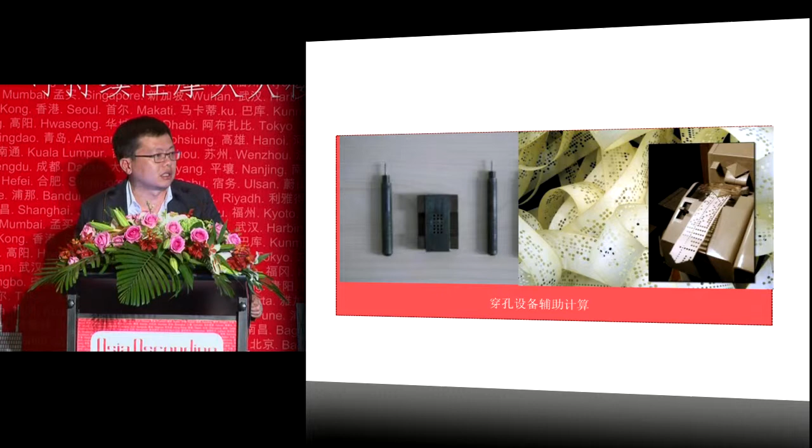And I think IT development has always accompanied our development in these several decades. You see, at the beginning, we just used the auxiliary calculation technology. In the 1980s, we used this kind of calculation method. But this is just a very small scale technology.

But in the 1990s, we had computer-aided design, or CAD. And today, we are still doing computer-aided drawing, but this kind of technology has already changed the design or engineering approaches to a great extent.

And then, according to my memory, around the year 2000, because more and more domestic big projects were being built based on cooperation, we absorbed a lot of advanced concepts, no matter whether in CAD or standards.

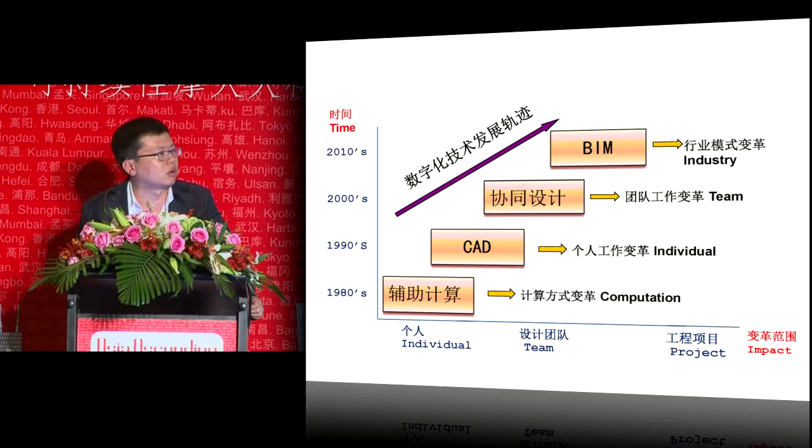And I remember East China Architectural Design and Research Institute at the beginning cooperated with OMA on CCTV. They were doing, for example, dissection of drawings and deepened analysis to control the quality of the drawings.

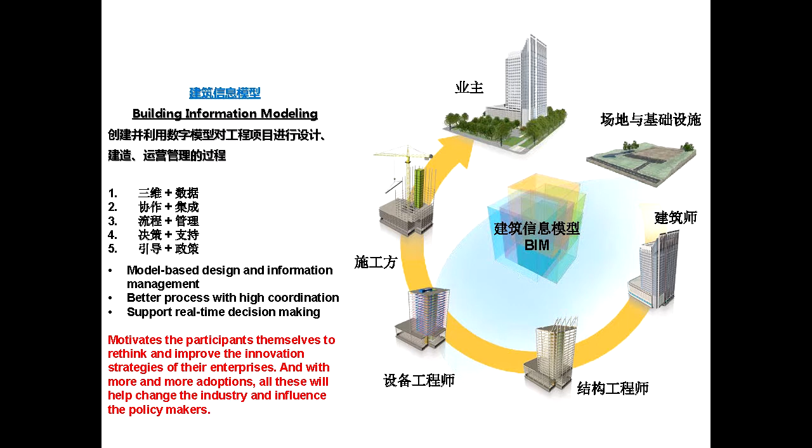And in the past 10 years, less than 10 years, BIM is gaining momentum. I think the appearance of BIM, or the appearance of the concept, for our industry, is actually a great driver for the industry approaches.

For the concept of BIM, I don't think I need to elaborate on it. Here I just listed our team's and our company's understanding of BIM. I think first, not only is it a three-dimensional thing, it is more based on data or information. And this is a great difference from past tools.

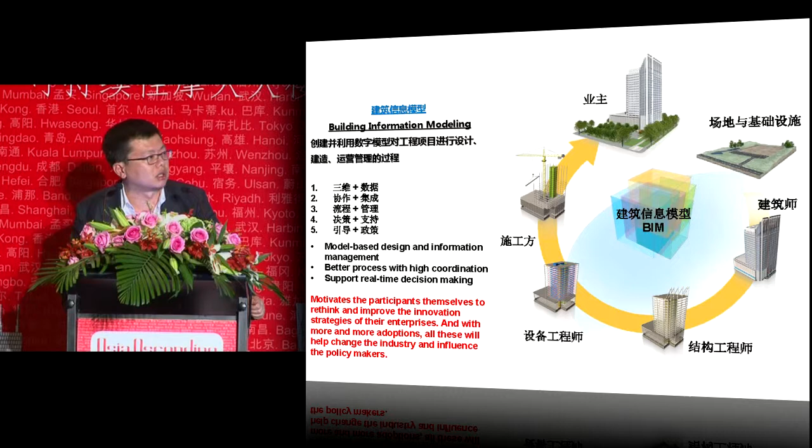Second, it emphasizes coordination and integration. That is, not only restricted in design, it can coordinate different parties involved in the project. Number three, I think the most important reflection of the change is in the process of the project. It can better promote the management of different parties of a project.

Number 4, in China, a lot of big, complex projects are pressed in time and they're also really complicated in structure. Owners have a great headache. They usually say that a lot of the time they are managing passively. With the progress of the project, their management becomes more and more passive.

But BIM can offer a lot of data. It can support our owners to have a better understanding of the project in real time, and can help the owners to conduct more active management instead of passive management.

Finally, I think the most important thing is that this kind of change is not only a change of the industry through this kind of model, it is leading different parties involved in the project to change their innovation strategy and technical development. So this is rather significant.

And during the process, with the increase of acceptance in the industry, I believe a lot of policy making and coordination from regulation can find a better or clearer direction.

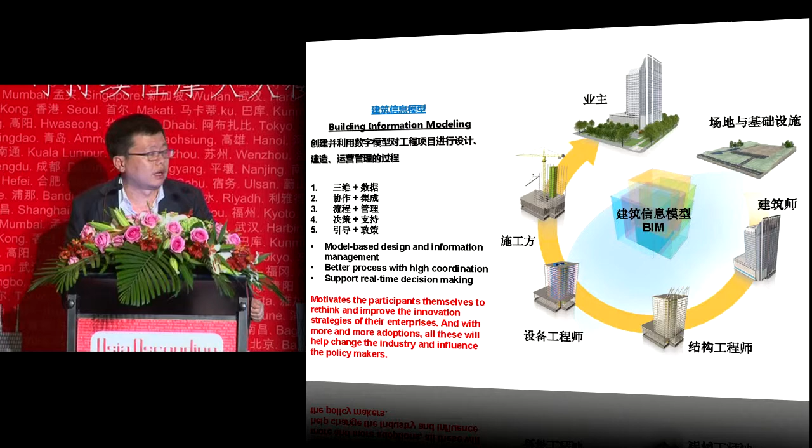Now, through one of our cases, I would like to share more with you on BIM. Because we are a big design institute, a big consultancy, quality is really important for us. Personally speaking, although design, construction, and management are all very important, I think with the aid of such a tool, if you can design really well, it can lay a good foundation for our project.

BIM can help us gain better design quality. We're always encountering a lot of problems. These are 3 of them. First, how to face the challenges from architectural shape. Now, more and more projects include nonlinear projects and complex shapes or forms; these are indeed the dreams of the designers.

Owners like these kinds of forms or shapes, but how can you ensure the good completion of such a project? How can you guarantee the implementation, instead of the final result after implementation being different from what was originally planned?

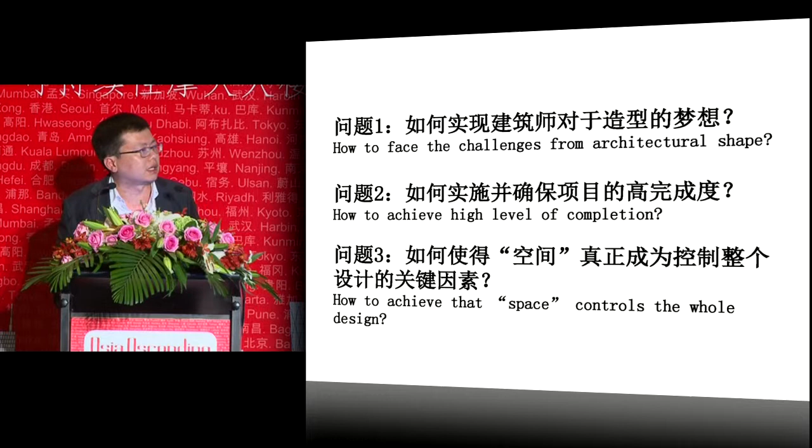The second is how to achieve a high level of completion. To be honest, currently we still have a lot of projects for which the completion is based on facade or horizontal design.

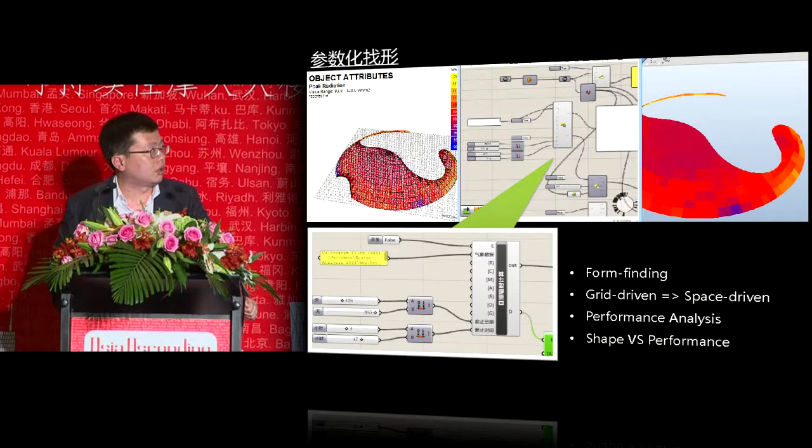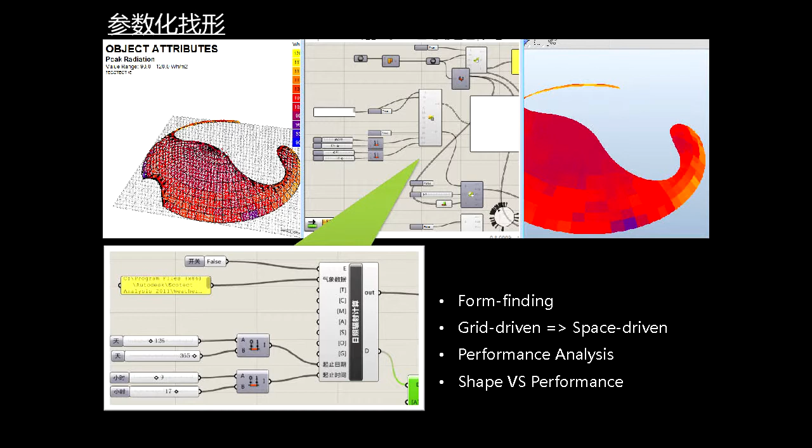Starting from the planning, not only we considered geometry, not only form finding, we also considered the local climate. And we looked at the meteorological data in that locality and looked at its influence on the solar radiation all year round in that place to try to balance the shape and the function for the building.

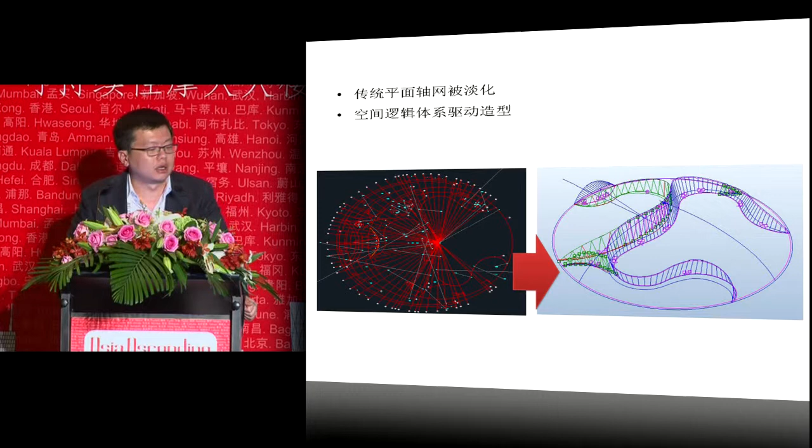And actually, the traditional axial network is faded, and we are looking at the overall spatial logic to look at the structure. A complicated structure is the steel structure. It includes over 2,000 steel rods. And the traditional method is just based on a very simple coordinate. But because the site is really special, and during the year the frozen period is really long, we hope that during the design phase we can cope with it better.

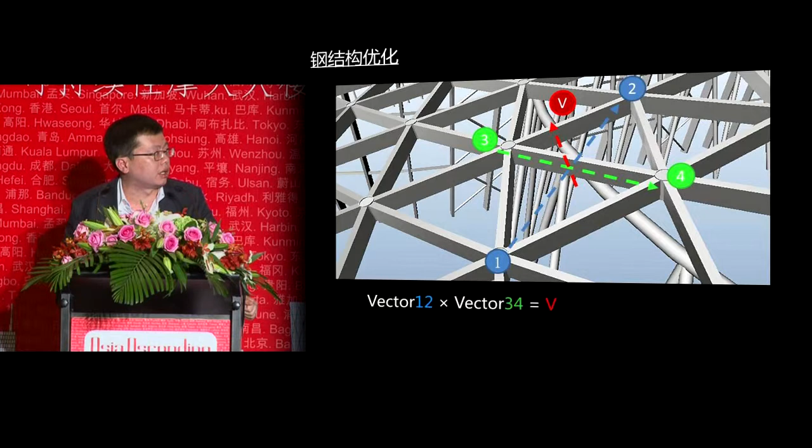And so we used a mathematical matrix method, that is to multiply the two vectors. But the whole project includes over 2,000 steel rods. If you do it for every rod, it's really complicated. Through BIM, all the nodes, all the coordinates of the nodes, and the relations of all these rods were established in advance. So all these components of the structure have their position in advance.

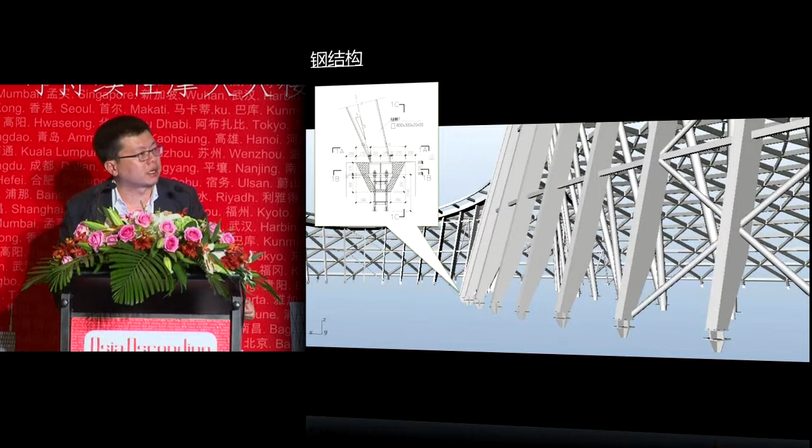In China, due to limitation of rules and regulations, the design and construction can hardly be integrated. But for this project, since it is located at a special location, we are quite lucky to do the design as well as the construction. We have three parts of the structures in terms of steel structures, membrane structures, and wooden structures. So during the structural design, we have many details attached.

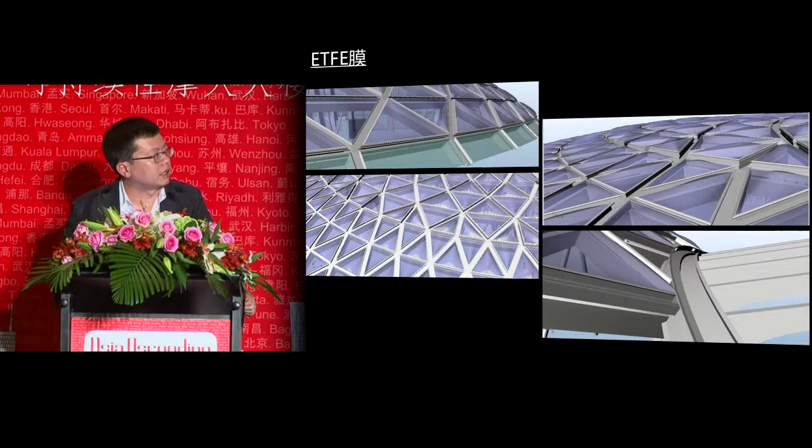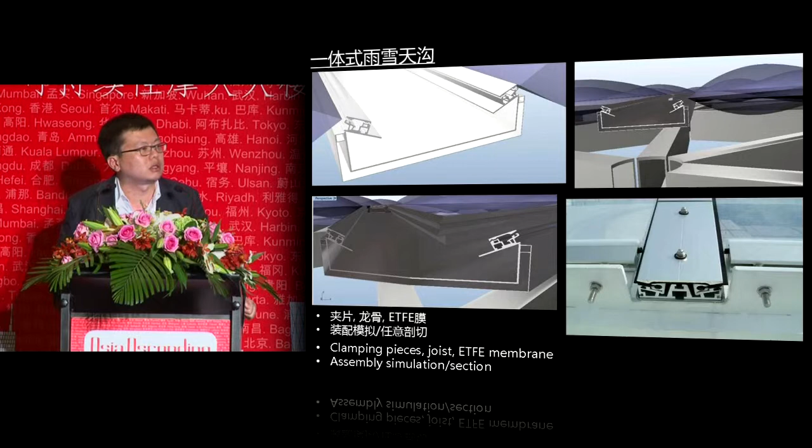There are so many nodes, and the nodes are facing different directions. On top of the roof, we have integrated rain conduits, and how to integrate the membranes with these rods is also designed in advance. And this is the integrated gutter design. And the other complicated aspect is the curtain wall. From the shape, you already found it's very hard to describe the shape.

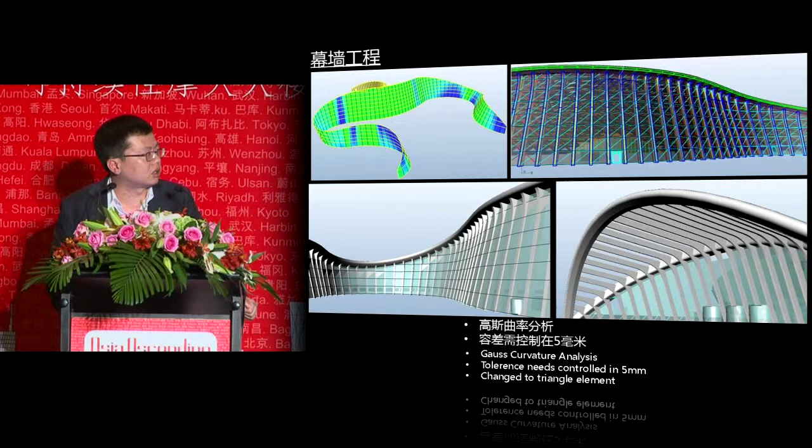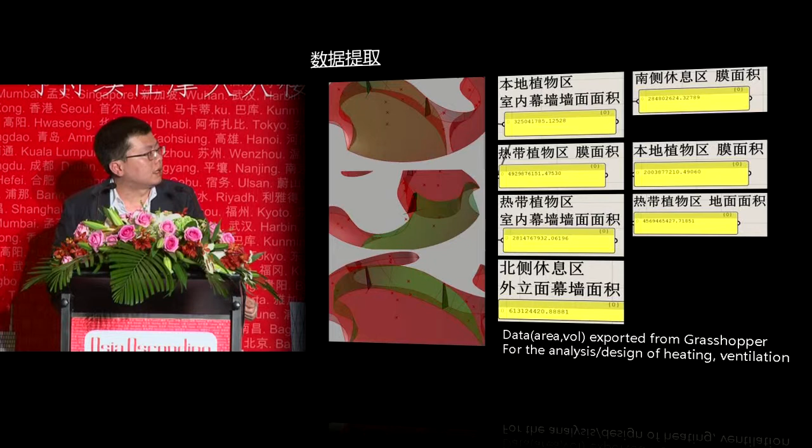We used some curvature change modeling to help us engineer the detailed designs, including the division of the entire surface, and the allowance during the installation should be controlled within 5 millimeters. So we decided to use triangle units instead of rectangle units. And for M&E design, previously we used very simple mathematical modeling. Using BIM, we can take advantage of the integration of different data in terms of dimensions and positions, and this data can be shared within different design aspects.

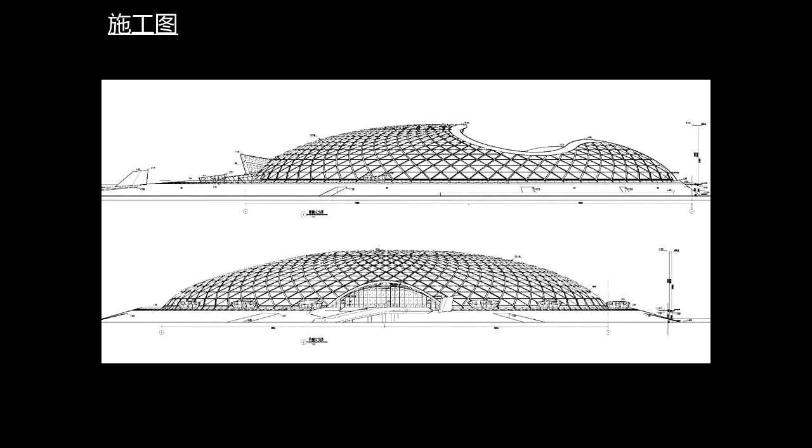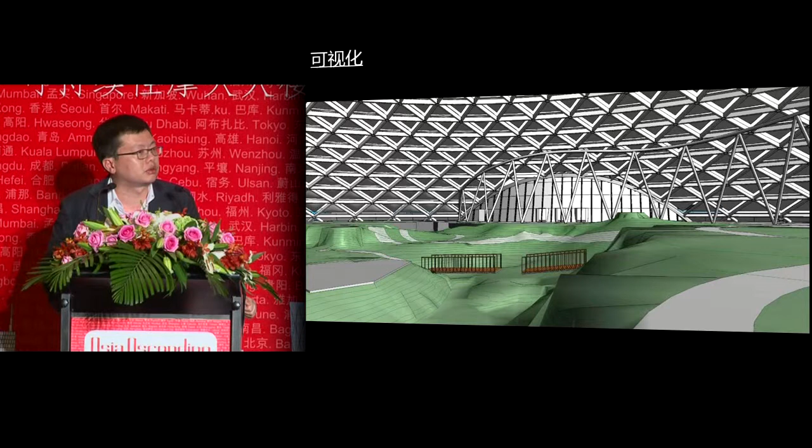This is the construction drawings, and in the middle of the lot there is a landscape, grass lawn, and also the option of the space. This is the final drawings with a lot of details. Visualization. This is a very good experience. We didn't do it from scratch. And also, we can print out a lot of structural details.

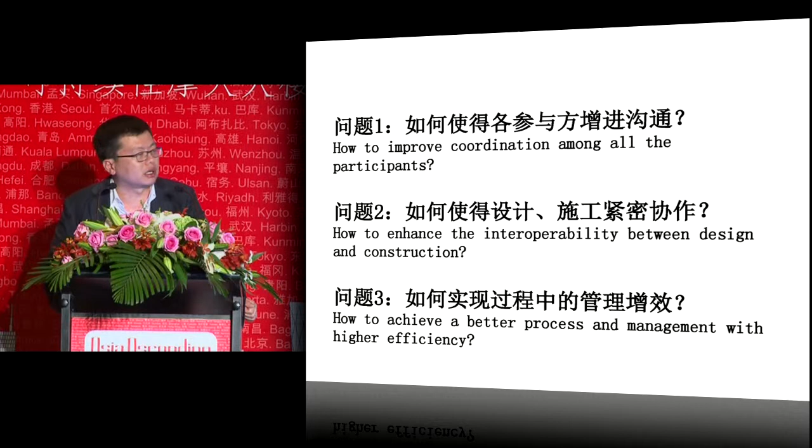The second part: the great help of BIM is a better integration of the processes. There are some questions which have been confusing us for many years before. How to improve coordination among all the participants, and how to enhance the interoperability of the construction and the design. And as I mentioned, we are very lucky to do the design as well as the installation.

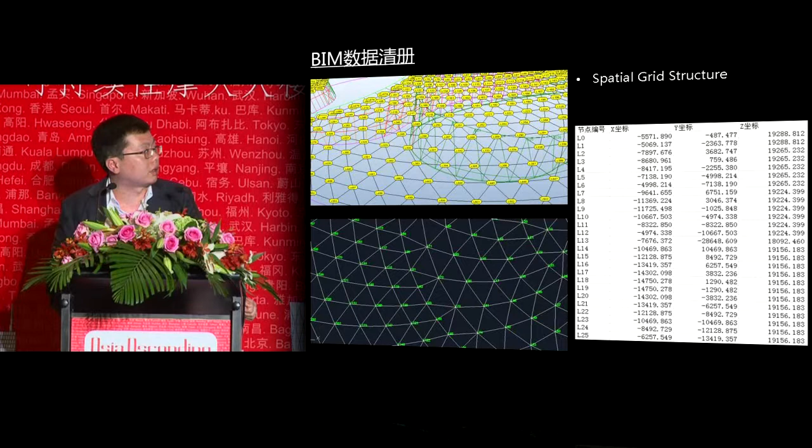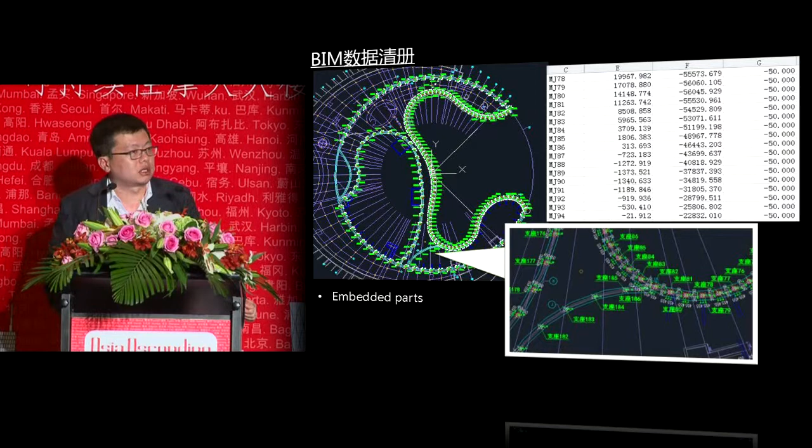Besides these digital drawings, we also have a large amount of reports. The spatial grid structure with all the three-dimensional coordinates of all the nodes, and also including the embedded components for foundations. In terms of cooperation, this is the Shenyang Culture Art Stadium. The entire project area is 100,000 square meters. This is not super big, but this is a very complicated project.

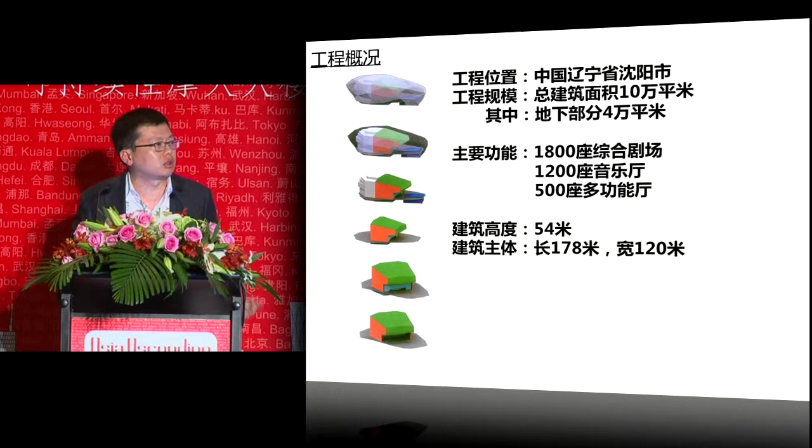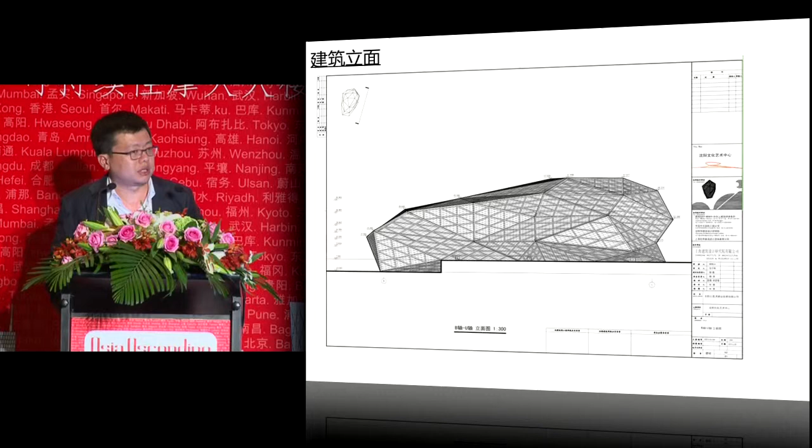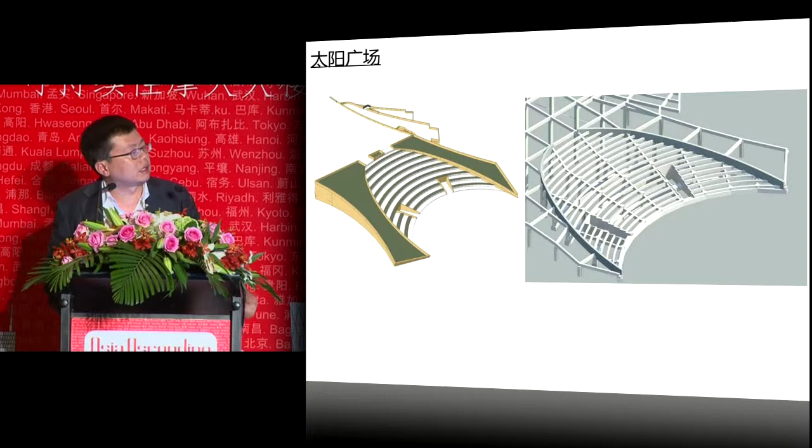The three functions are stacked vertically. So every elevation chart should be marked with the height, the altitude, and this facade is also very complicated. Curtain walls with the coordinates. These are the results from BIM systems. This is the foundation. This is the outdoor plaza and landscape.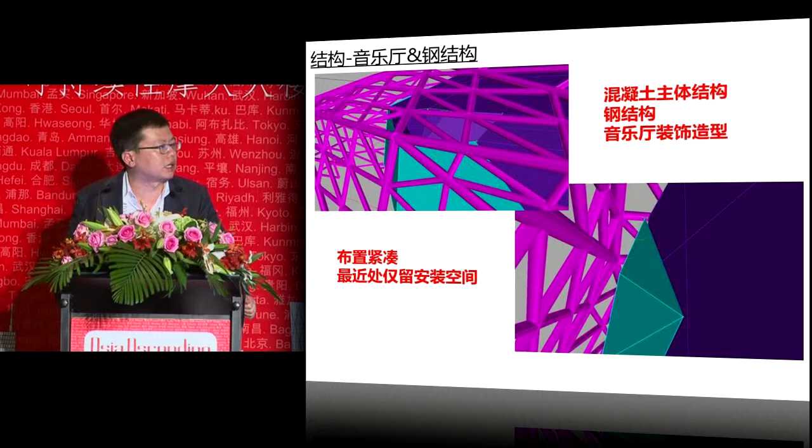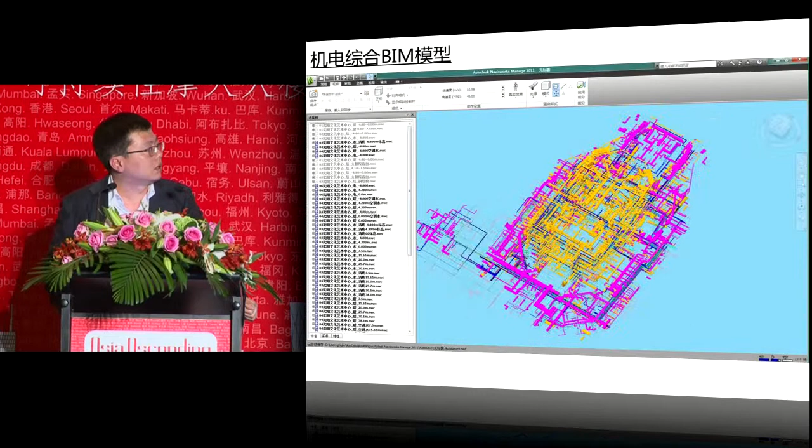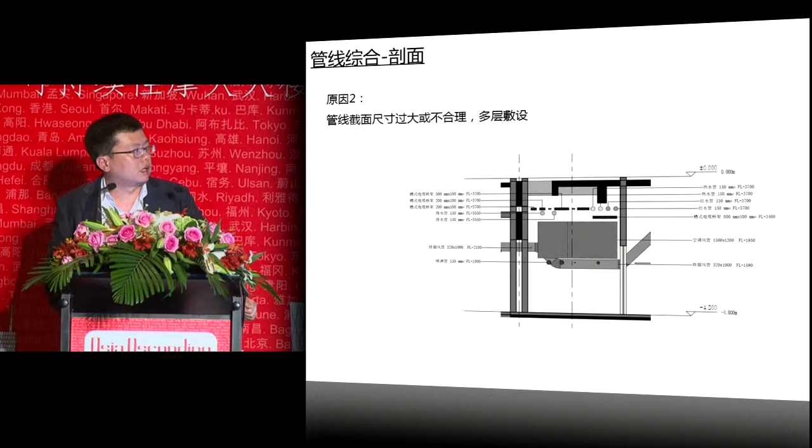And for construction, there are a lot of installation requirements and maintenance and operation requirements. We hope through appropriate design, we can minimize their workload in the coming years. This is the M&E model in BIM. This is a large-scale model. And this is the pipes and lines profile. We did a lot of communication work with the teams. The owner has very specific requirements on the clearance height and the location of each function.

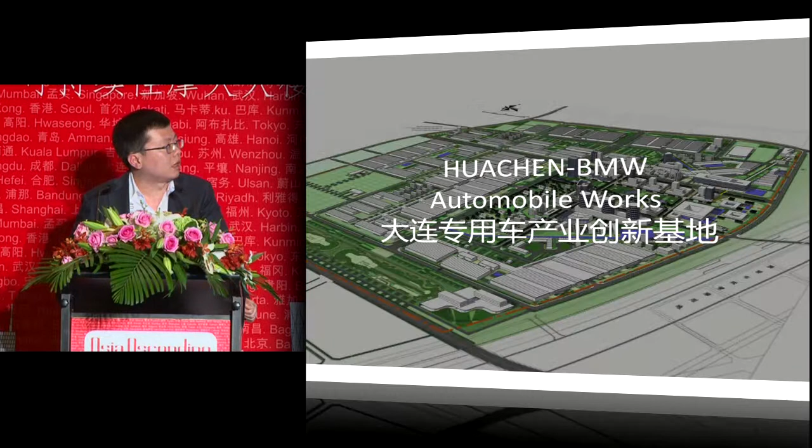Better cost control and decision making is also a major driver for development of BIM. Initially, I already mentioned the owners need this data to make decisions to well manage their property. So we can provide data for them, and also this data is dynamic and real time, and modeling is also dynamic to support the decision making. This has been very helpful.

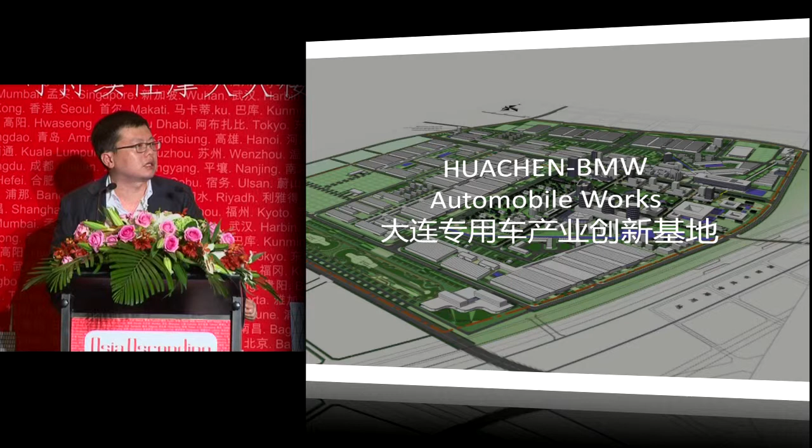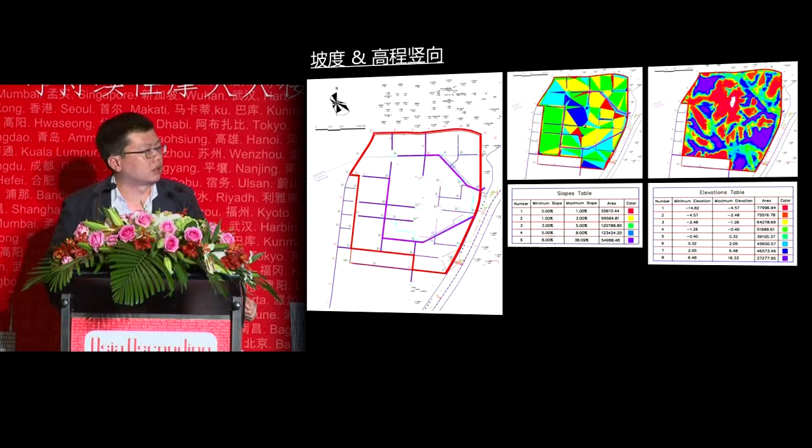This is another case. Just finished it. This is Huachen BMW Dalian Automobile Works. This is one of the largest single industry projects in Dalian. It covers 6 square kilometers of area, and all the design was started on a 3D basis. Any adjustment to the lot, we can come up with the adjustment to the fillings and the cuttings, and also the altitude data instantly.

And this is the cutting and filling drawings. The owners had 3 requirements. First of all, the cutting and the fill should be balanced, and also the total excavation work should be minimized. And also, they should have 4 million of soil residue for future use.

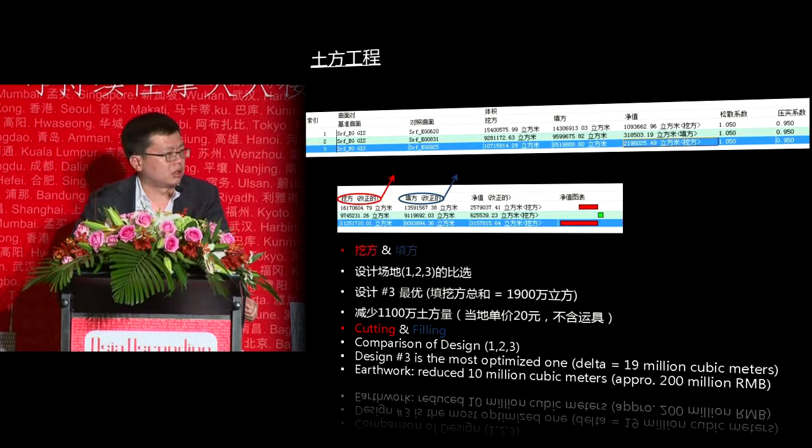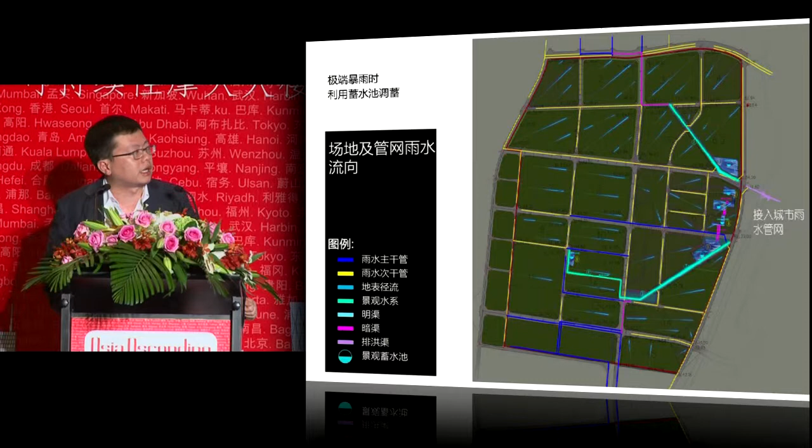So this is the optimization of the excavation work. Based on estimation, we have saved the cost around the amount of 100 to 200 million renminbi. And also, we have a very good and detailed chart for the water management systems, including the water pipes and rainwater harvest systems. At the east side, we have designed a rainwater collection tank.

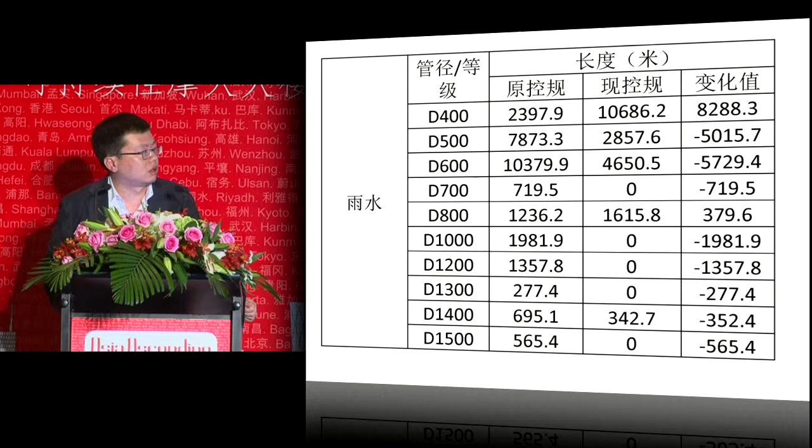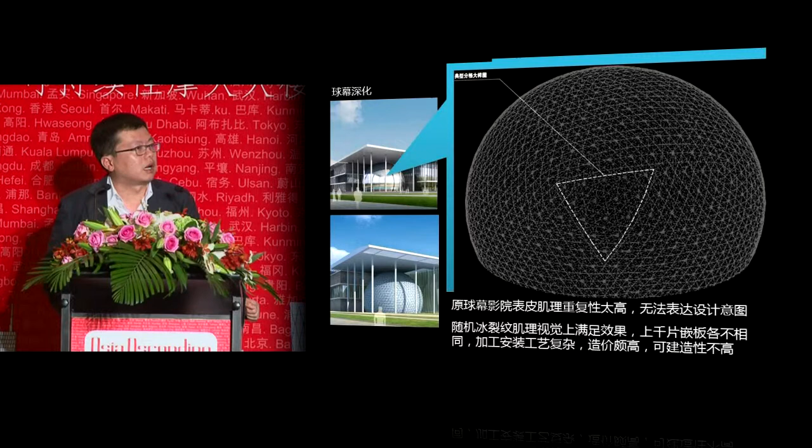And we also managed to cut the cost for the investment on the utility infrastructure through BIM system. This is another case under construction, Liaoning Science and Technology Museum. In this project, the most complicated thing is the sphere part in the middle. This is a curtain wall based structure, and the owner wants the best aesthetic result with lowest cost. Plus, this is a double skin design.

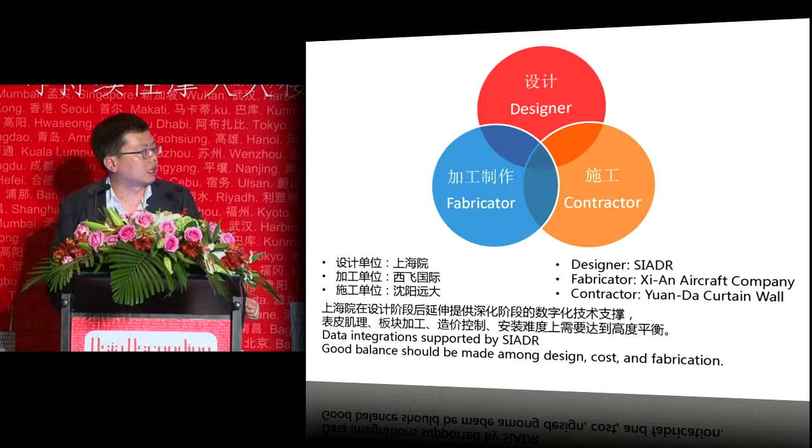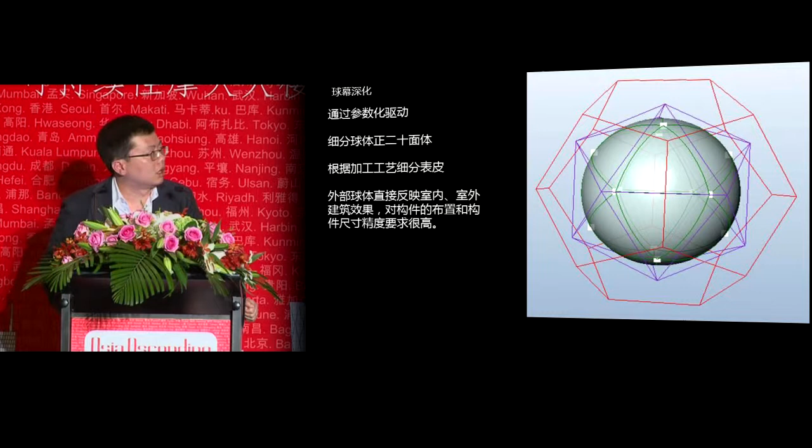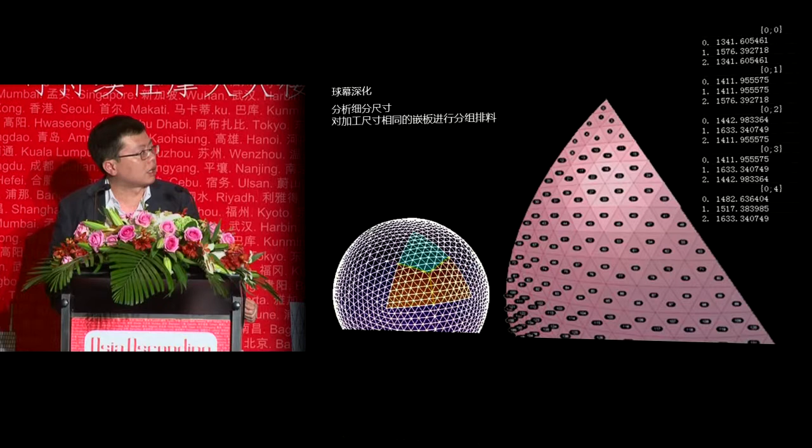Currently, we are cooperating with the Xi'an Aircraft company as the fabricator, and the contractor is a Yuanda Curtain Wall Company in Shenyang, and we do the design work. This is the sphere. We divided that into 20 identical triangles, and this is the randomized skin texture. We have to have detailed size and parameters, area, and coordinate data to our installation contractors. This is a detailed curtain wall rendering drawings.

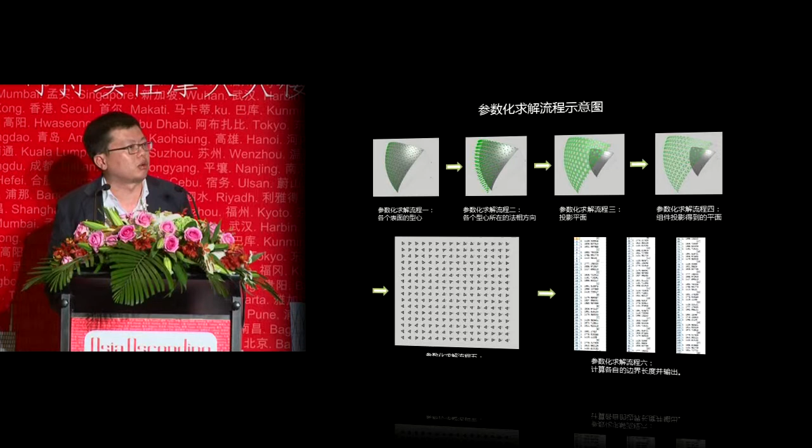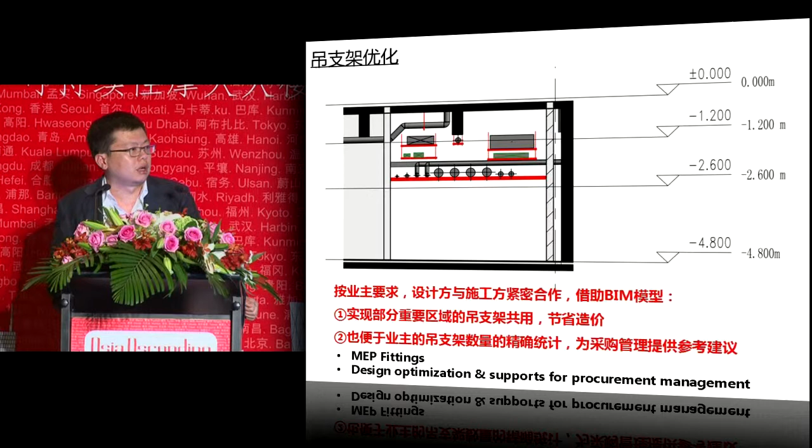I always emphasize the parametric design is only a method. The design is the key. And in this culture and art center design, we also have some good practices on these suspending frames. In some key areas, they have the sharing of common frames. This can reduce the construction and the sourcing prices.

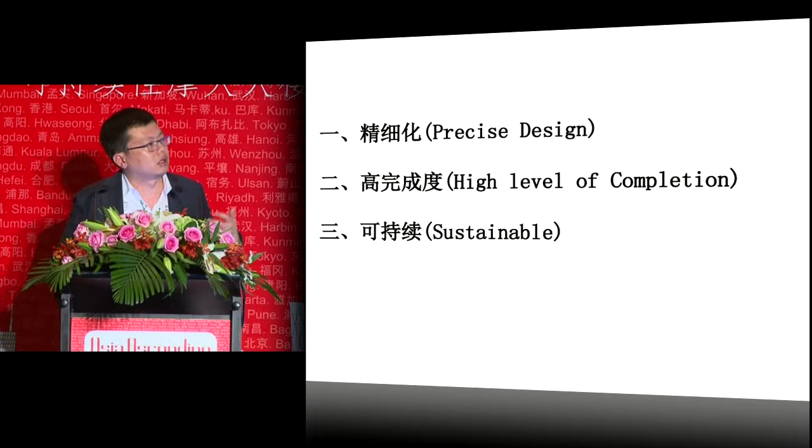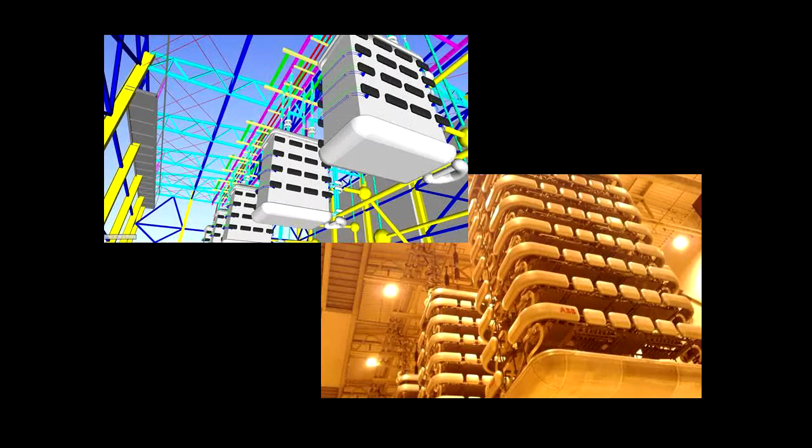I think ultimately we provide a better delivery to our owner. A good delivery includes a precise design, high level of completion. This is also very important. It is implementable, and thirdly, it is sustainable. When it comes to the as-built phase, how we can collect more data into the BIM system and support the future maintenance and operation. And also we have a State Grid project. This is some of the photos and the screenshots as built.

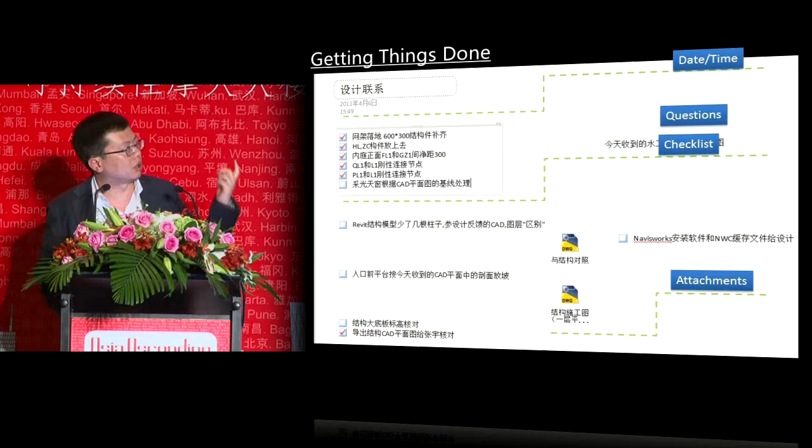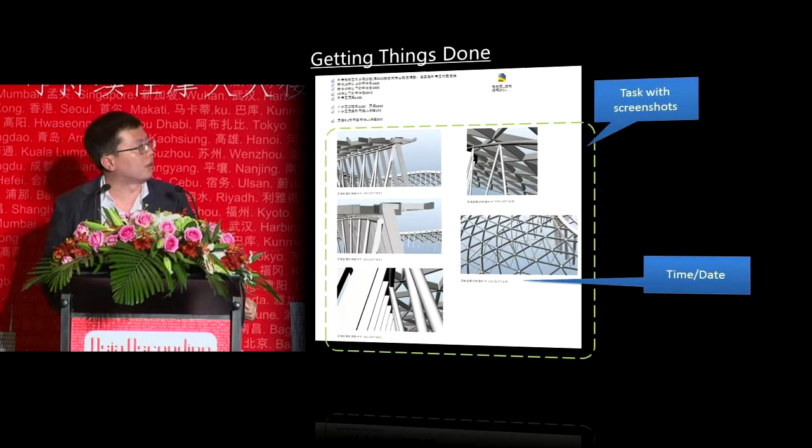More importantly, BIM system can make all stakeholders stronger, not only the owners, but also all the stakeholders. And we can also integrate the ISO quality management system into the BIM system with the same platform. Every aspect of work can be digitized, including meeting minutes and to-do lists. Everything will be included in the database. And it can also include these snapshots with the author information and the timestamp. This is very helpful to provide effective management.

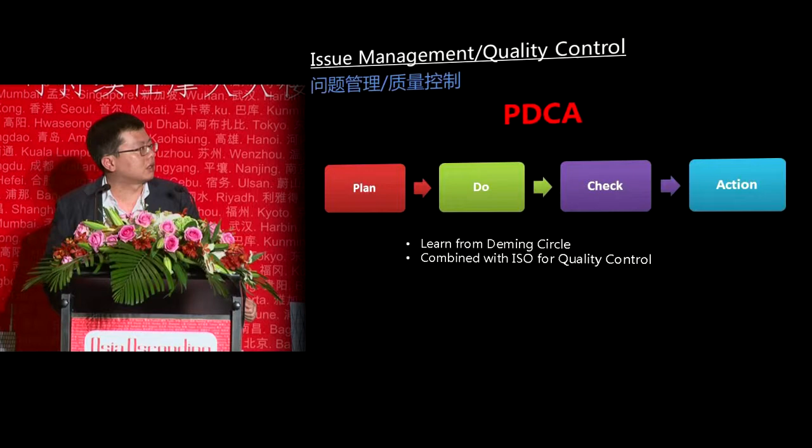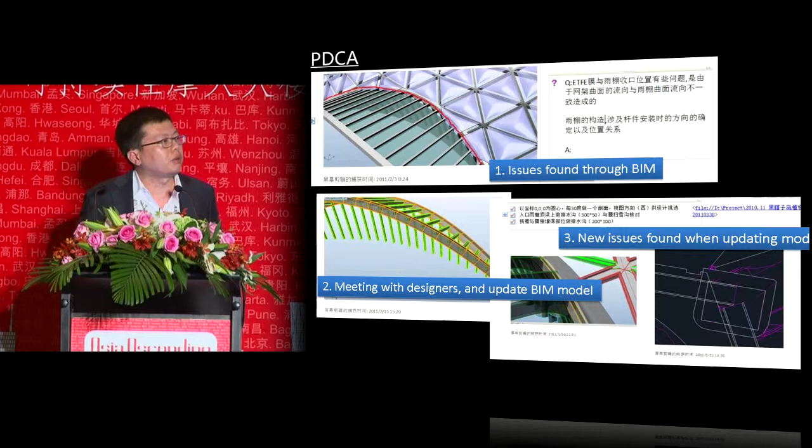This is the Deming circle, PDCA. For all those important issues, we will model them and communicate with the designers. And based on the discussion result, we will update the models. It not only saves us a lot of work, but also better qualities. As I mentioned in the botanical garden project, we need to work with many aspects. We have to close up the loop.

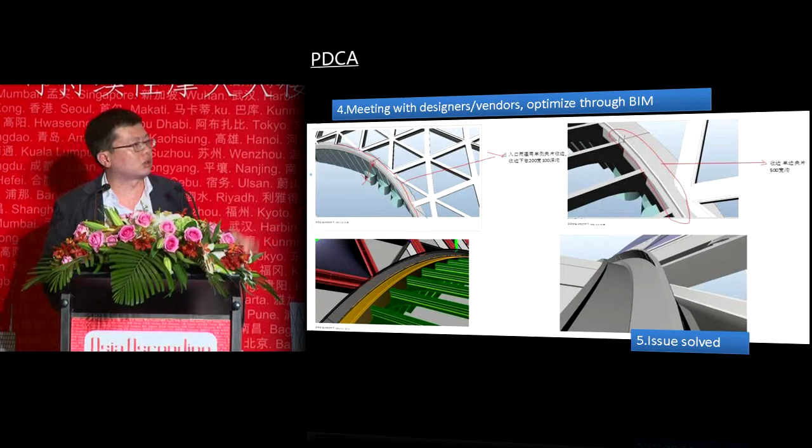These are my points. First keyword is integration. Integration has two aspects. One is technical aspect, one is management aspect. Technical aspect, even without BIM system, we have to finish all the technical details. The Jin Mao Tower, during the design phase, we didn't have a BIM system. But still, we managed to finish this project in high quality. But for management aspect, the BIM system can provide more support.

And the influence of integration can be reflected in the cases I have shared in terms of quality, coordination, and the process integration, and also ultimately it will provide added value to this project. This is my conclusion today. 2 days ago, during the opening ceremony, Mayor Shen mentioned building is one of the inevitable results of the urbanization process. I feel the same way.

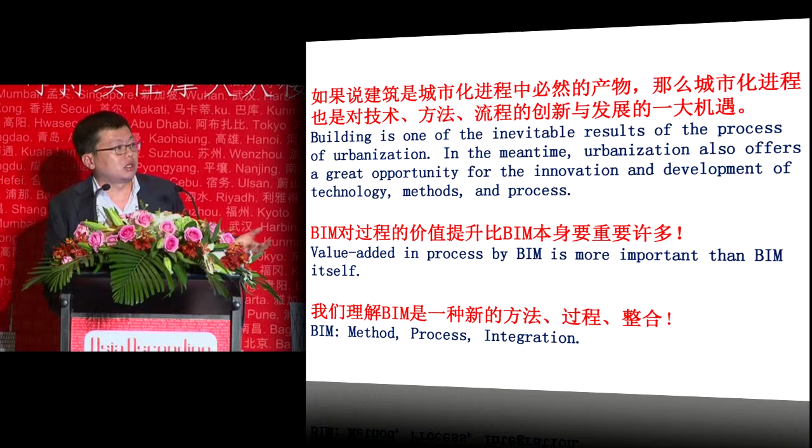In 20 years, in 100 years, nobody's going to talk about BIM, but we still need coordination, integration between the designers and contractors. So the BIM concept is weakened. It will become part of our daily life. So BIM is a new method, a process, and integration.